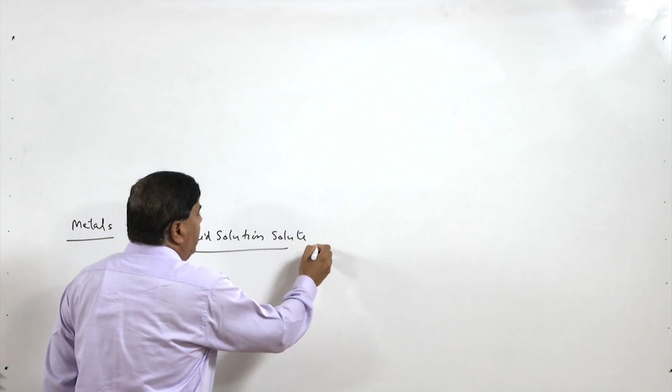We know that different metal systems are strengthened using different mechanisms, and these include solid solution strengthening, where in metal A, solute B is incorporated so that strength is achieved. Various types of solid solutions are formed, like substitutional and interstitial. Interstitial solid solution results in much higher strength with the addition of the solute compared to substitutional solid solution.

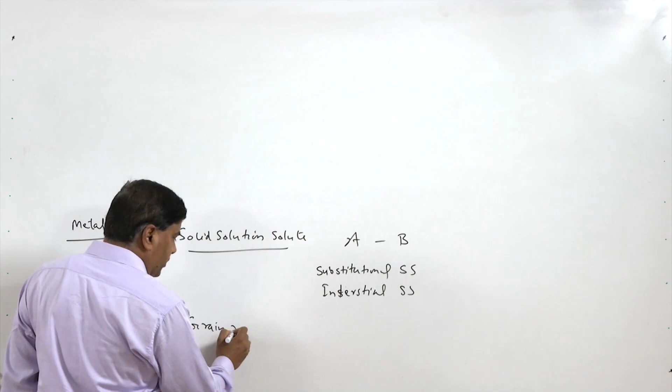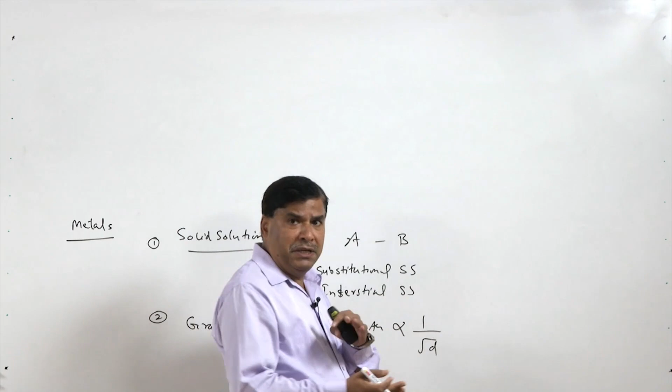Another commonly used mechanism is grain refinement. Metal systems are also strengthened by grain refinement, where the strength or hardness is found inversely proportional to the square root of the grain size. Finer the grain, higher is the strength. So whatever factors increase the grain size, either in the weld or in the heat affected zone, will lower the hardness as well as yield strength.

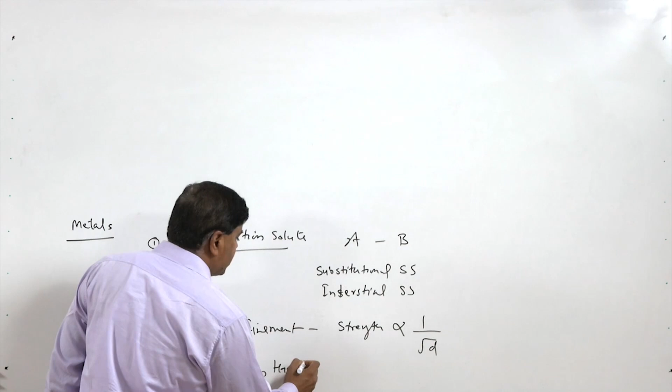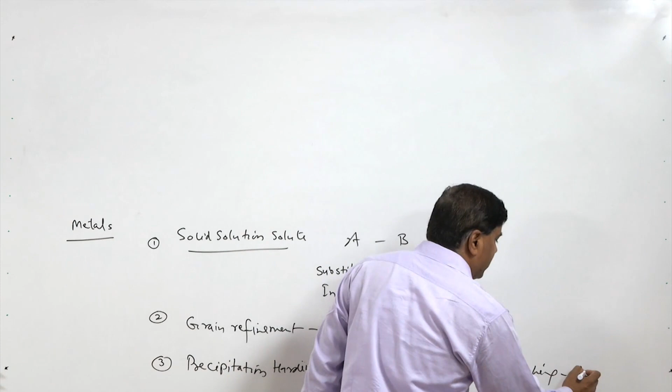Third is precipitation hardening. In this mechanism, whatever alloying elements are there, they are dissolved in the solvent through solution treatment, followed by quenching, so that a supersaturated solid solution is formed, and then aging is undertaken. During aging, precipitates are formed here and there, and they impart strength by forming precipitates in the matrix of the metal.

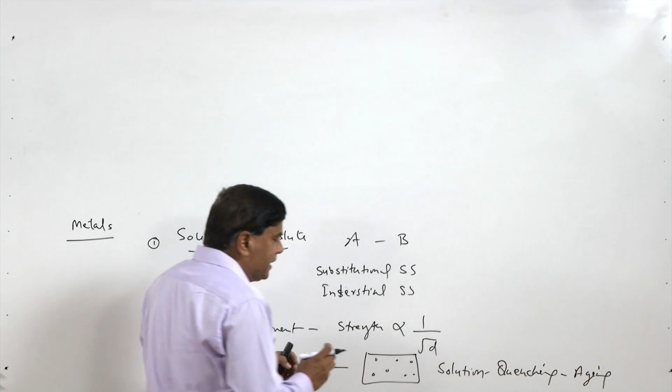Whatever factors lead to enrichment or increase in number of precipitates will strengthen the material. Otherwise, whatever factors cause coarsening of precipitates or their dissolution - there are two aspects, either the precipitates get dissolved in the matrix or they get coarsened - both these factors, due to application of heat, will lower the strength, because these metal systems get strength from the precipitates, and whenever due to external factors like application of heat, the precipitates either get coarsened or dissolved, the metal gets weakened.

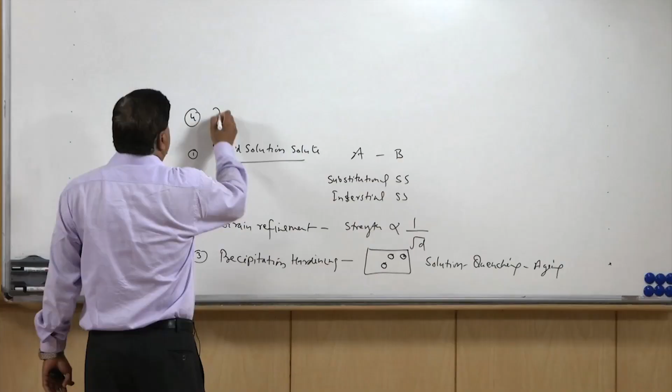Then the fourth mechanism is dispersion hardening. In dispersion hardened metals, the matrix is incorporated with certain constituents which do not interact with the matrix itself. These are mostly hard, but can be soft also to impart specific properties, like graphite or lead is also incorporated. Graphite is incorporated for the lubrication effect, and lead is incorporated for free machining, for developing free machining metal systems. But it is common to incorporate hard constituents in the matrix.

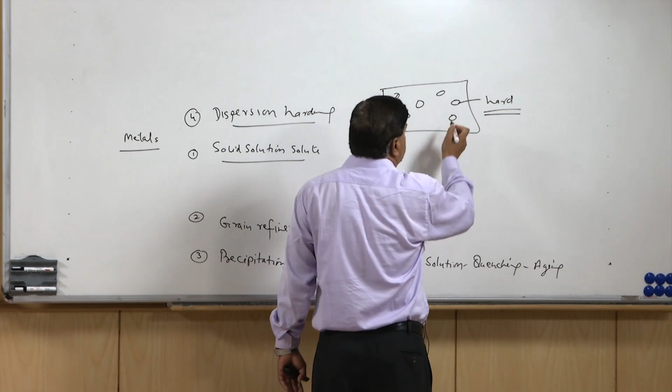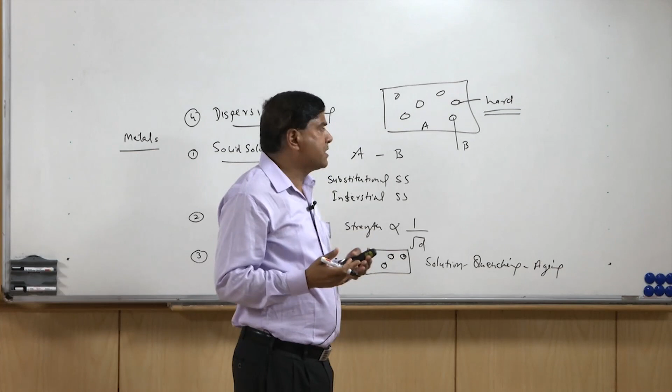So these constituents are not expected to interact with each other - say matrix is A and the constituent being incorporated is B - each constituent retains its own identity, and thereby imparts increased hardness, strength, or improved lubrication or wear resistance due to the lubrication effect by solid lubricants like graphite, or improved machinability, etc.

So in this case, the application of heat during welding does not actually affect the characteristics appreciably, except whatever change in properties occurs due to the change in grain size from the application of heat.

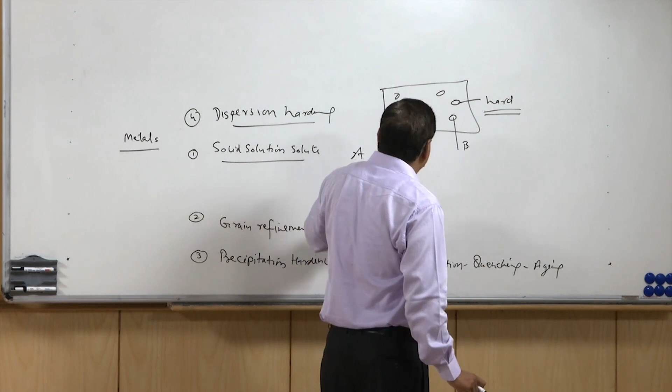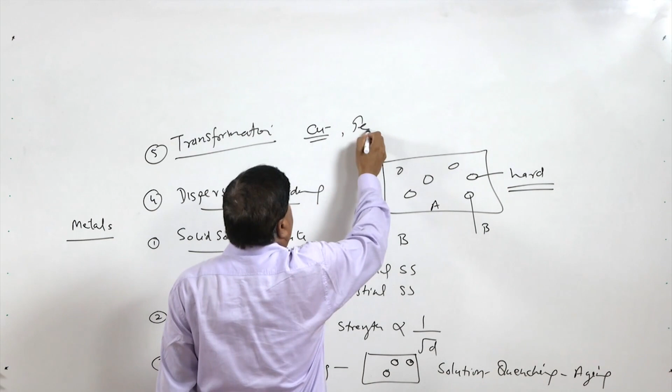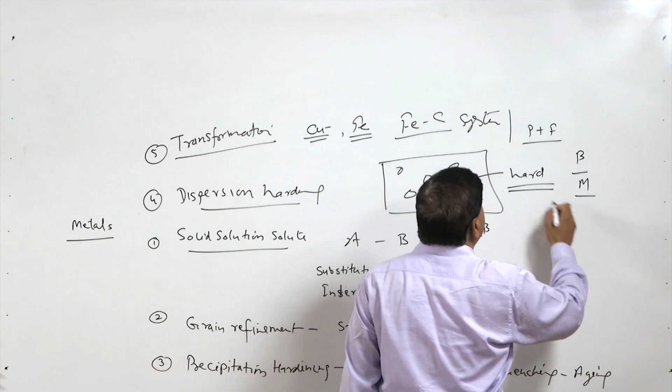And fifth is transformation hardening - transformation hardened metals, like these may be copper based alloys, or mostly these are iron based alloys. We know iron-carbon systems form steel or cast irons as per concentration. These systems result in formation of different types of phases, like in normal carbon steels we find pearlite and ferrite, but when subjected to specific kinds of heating and cooling cycles, we may have bainite, martensite, or a very fine mixture of ferrite and bainite, etc. Various phases can be formed which have their own characteristics, and accordingly the properties will be affected.

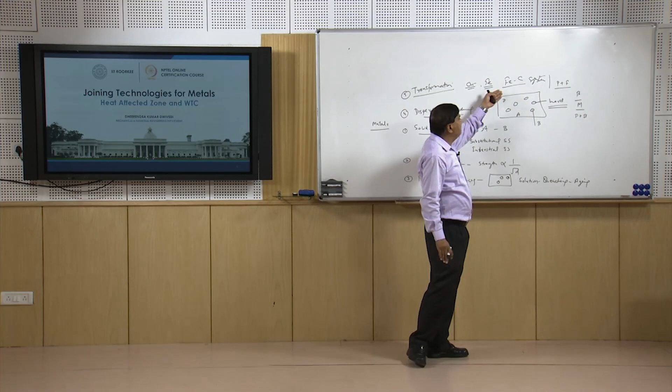Mostly in case of welding, the heating cooling cycles are extremely fast. So the hardenable iron carbon systems result in mostly hardening of the heat affected zone. So these are the five mechanisms which are there, and their relative effect is what we will be seeing.

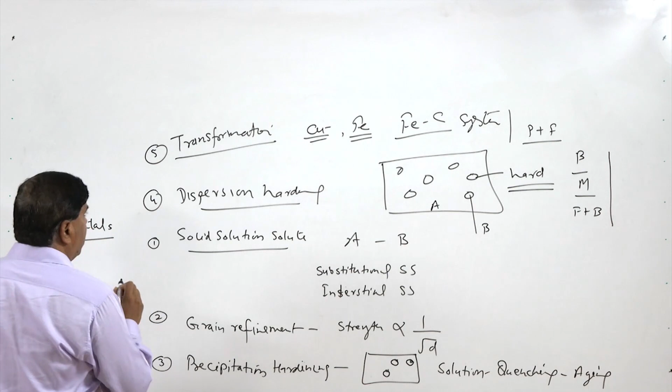There is one more, yes, the work hardening mechanism, the sixth one, which is also commonly used for strengthening of the metal. In work hardening, the metal system is deformed plastically, which produces a large number of dislocations here and there, and these dislocations interfere with the movement of other dislocations along the slip planes under external stresses. Whatever new dislocations are generated act as a barrier for the movement of other dislocations, thereby increasing the strength and hardness of the metal system.

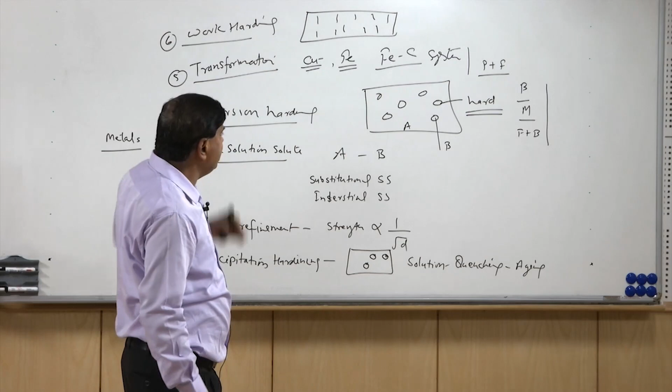As far as welding and the application of heat is concerned, these dislocations actually annihilate, they recover, they are lost due to the application of heat. So work hardened metal systems under the application of heat have the number of dislocations reduced, which in turn softens the metal system.

So as far as the heat affected zone is concerned, different metal systems strengthened by different approaches respond to the heat in different ways. What is that effect? That is what we will be seeing.

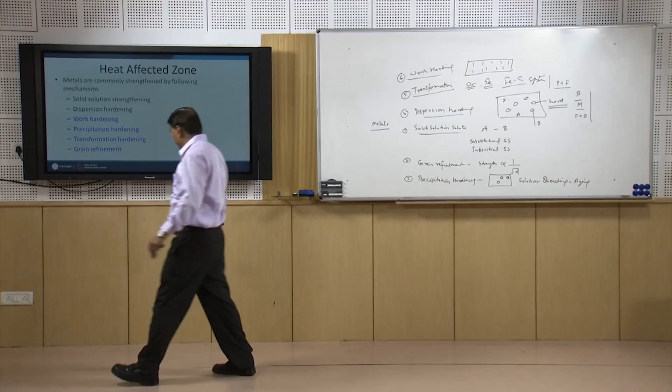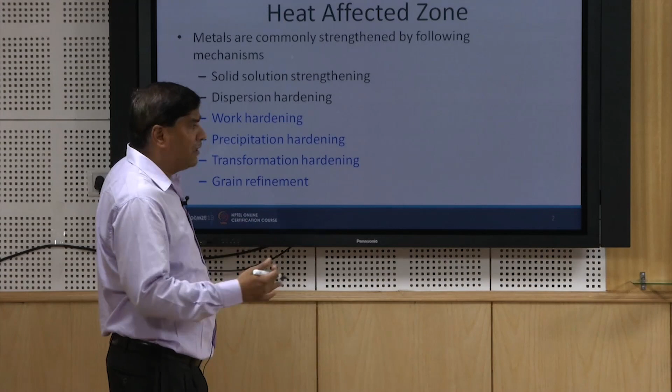Solid solution strengthened and dispersion strengthened or hardened materials are somewhat less affected by the heat applied during welding, while in the work hardening system, the effect of work hardening is lost due to annihilation or recovery of the dislocations. Precipitation hardening is affected due to the application of heat during welding in the heat affected zone near the fusion boundary. These precipitates either get coarsened, or get lost, or get dissolved due to the application of heat, so the metal gets softened.

In transformation hardening, with a high rate of heating and cooling, in case of ferrous metal systems, this mostly causes hardening despite grain coarsening and grain refinement. The metal systems which are only strengthened by grain refinement will have their hardness and strength lowered by coarsening in the heat affected zone.

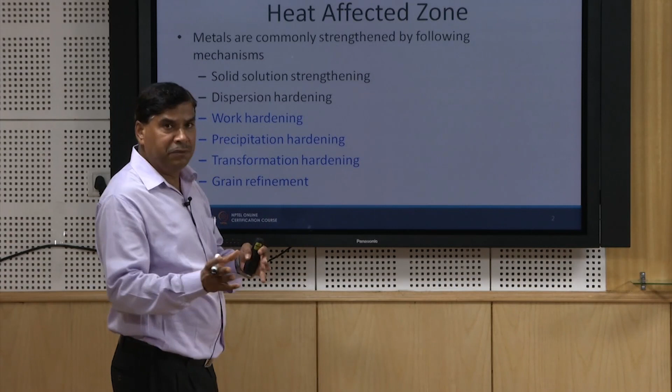So this is a very generic kind of description of the different metal systems and the way by which things are affected with respect to the heat affected zone. Now I will elaborate what the heat affected zone is first, and then the way by which specific metal systems are affected with the application of heat or due to the weld thermal cycle.

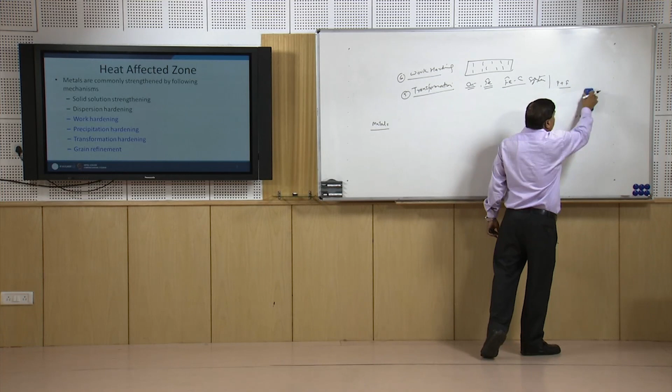The heat affected zone, as it reflects from its name, is the zone or region of the base metal which is affected by the heat applied during the welding of a given metal system. Every region which is affected by the heat, in terms of structure or mechanical properties, will fall under the category of the heat affected zone.

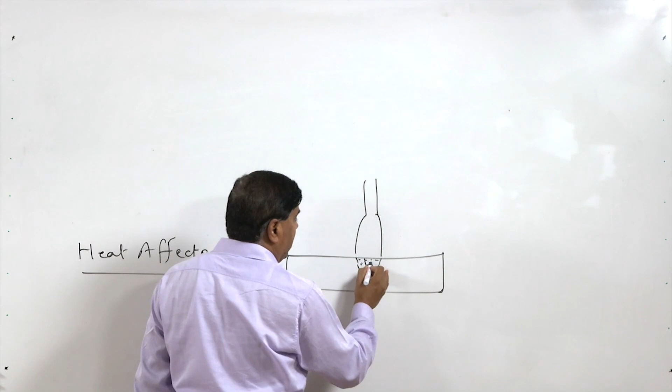During welding, the plates are joined with the application of a heat source, say a suitable arc is used for melting the edges of the plates to be welded. This melting results in the weld metal, and some of the heat applied for melting the edges of the plates is transferred to the underlying base metal. This heat, which is transferred back to the base metal away from the weld metal zone, is termed the heat affected zone.

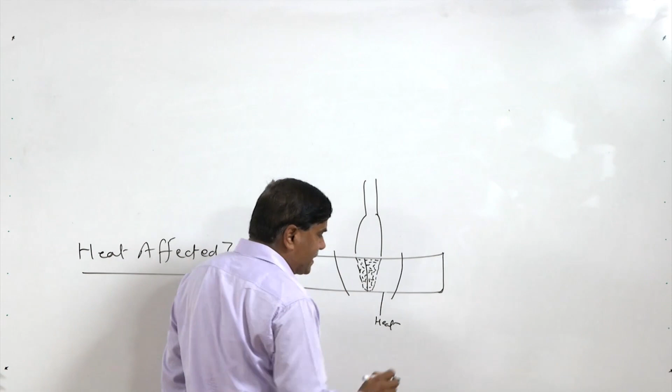But up to what extent the heat affected zone will be formed depends upon the distance up to which the change in properties is observed.

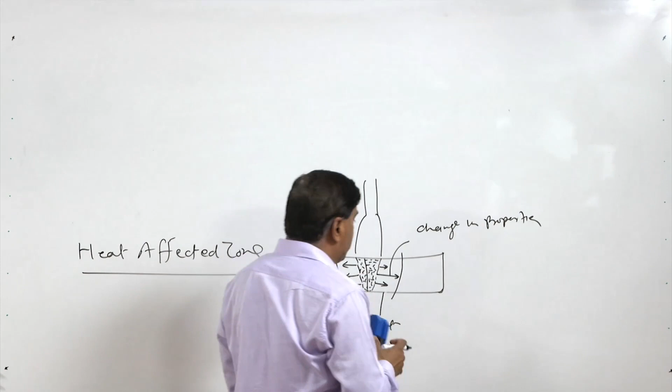Heat will obviously be transferred from the fusion zone to the base metal side, in both directions, causing a rise in temperature. The rise in temperature, up to a particular limit for a given metal, will cause a change in properties of the base metal.

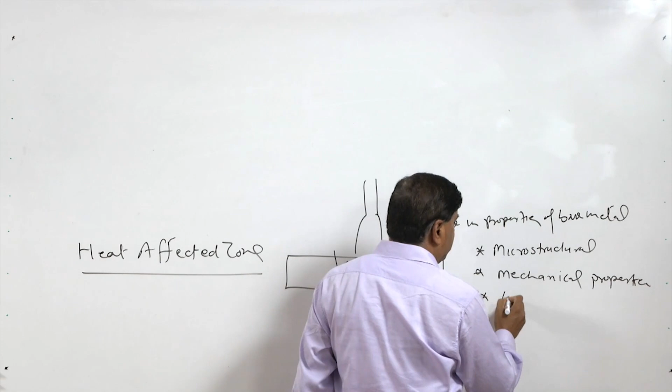This change in properties may be in respect of microstructural variation, in terms of mechanical properties, wherein either hardening or softening of the metal in the heat affected zone can take place, or there can be loss of corrosion resistance.

Corrosion properties can also be affected. Whenever heat is applied to the plates for the fusion purpose, some of the heat is transferred to the base metal, and this will change the underlying base metal properties in respect of structure, mechanical properties, and corrosion properties, either singly or in combination.

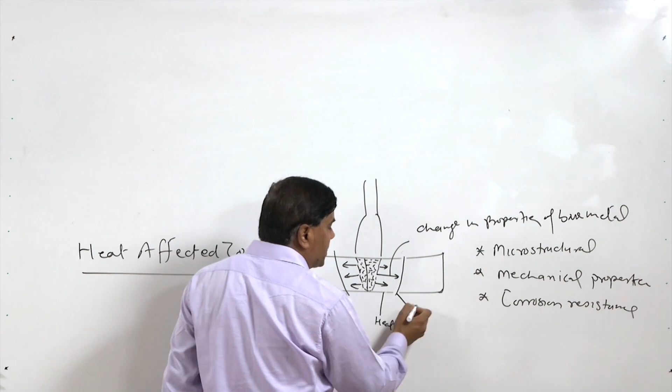The distance up to which these properties are affected is material specific. This change may occur up to the region which is heated above 200 degrees centigrade, or it may be above the region heated above 500 degrees centigrade, depending upon the metal system.

For example, whenever aluminum systems are welded, we will see that the regions heated above 150 degrees centigrade will be falling in the heat affected zone.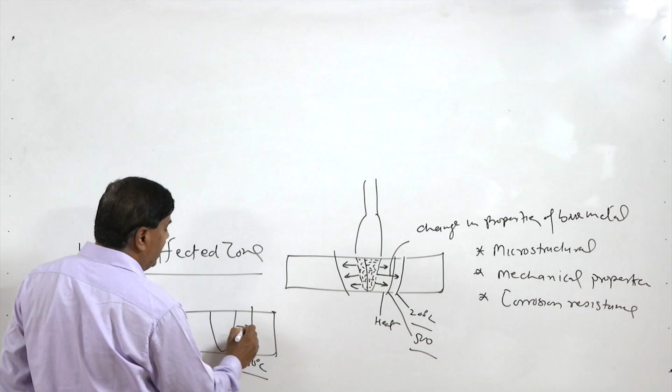If it is steel, say carbon steels in normal conditions, the regions heated above 730 degrees centigrade, like carbon steel in an anneal condition. If it is in quenched and tempered conditions, like Q&T steel tempered at 400 degrees centigrade, all regions heated above 400 degrees centigrade will be over tempered. So all regions away from the fusion boundary heated above 400 degrees centigrade will fall under the heat affected zone.

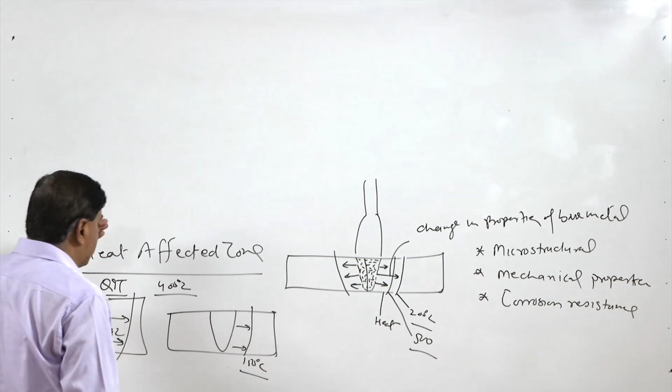So the temperature above which the heat affected zone is formed is material specific, and even for a given metal system, its condition also affects that particular temperature. This temperature may be 150, 200, 400, 800, anything, depending upon the kind of metal system we are talking about.

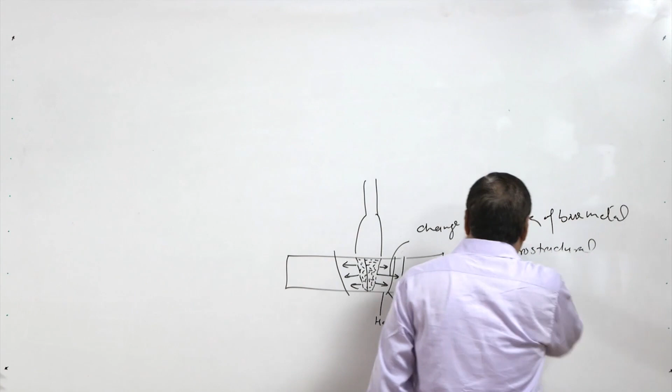So this is how the heat affected zone is defined, and the heat affected zone will experience the change in properties due to the application of the heat applied during welding.

Further, whenever heat is applied, fusion will occur at the faying surfaces. If we take 3 points away from the fusion boundary - point 1, point 2, and point 3 - each point will experience a different weld thermal cycle. Point 1 will experience the higher peak temperature and higher cooling rates.

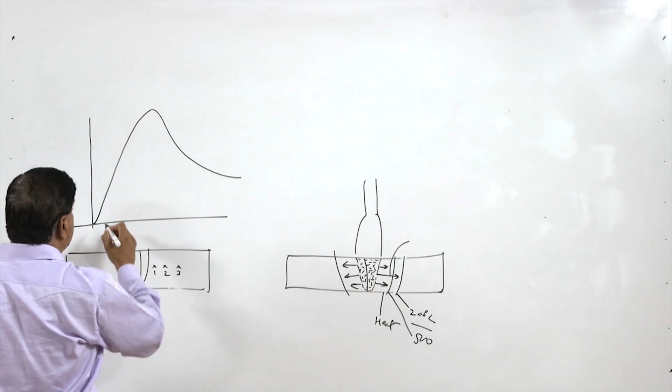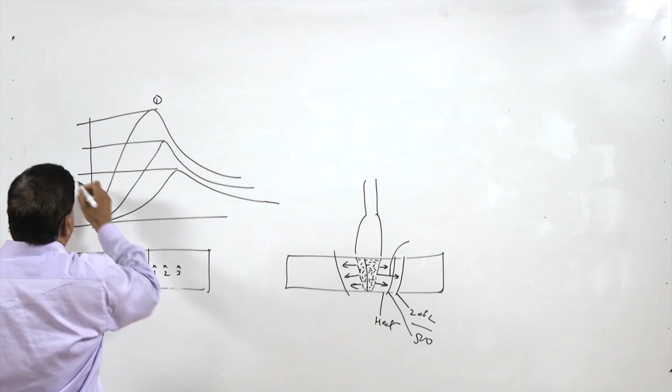Similarly, point 2 will experience somewhat lower peak temperature and lower cooling rates, and point 3 even lower peak temperature and lower cooling rates. So for point 1, point 2, and point 3, these are the respective peak temperatures - in the y axis we have temperature, in the x axis we have time.

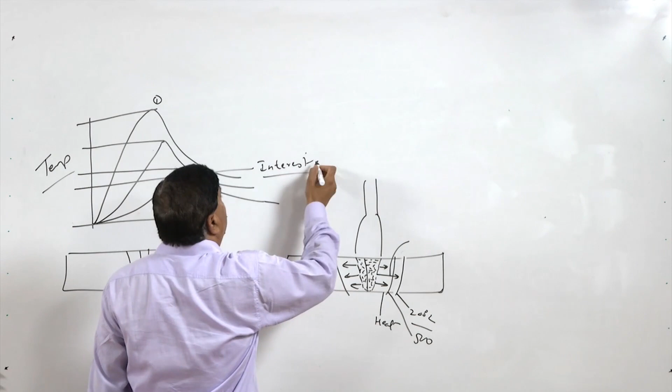What this reflects is that if we take any particular temperature, the 3 points will be exposed above it for a particular duration. So if the temperature of interest is this - the temperature above which properties will be affected - that's the temperature of interest.

So the duration for which point 3 will be exposed above this temperature is just this much, while this is for point 1, this is for point 2, and this is for point 3. The duration for which point 2 will be exposed above the temperature of interest will be this much.

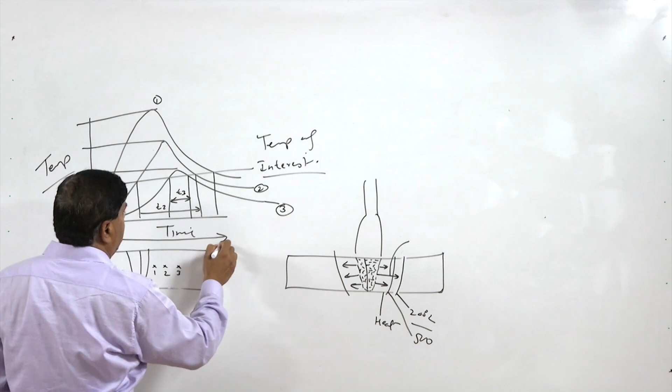So this is T3, this is T2, and what we see for T1 is really very long - this much. So the temperature T1 duration is really very long. If the temperature of interest is known, we can see that point 1 will be exposed for the maximum time T1, then T2, and then T3. So T1 is maximum, T2 is lesser than T1, and T3 is minimum.

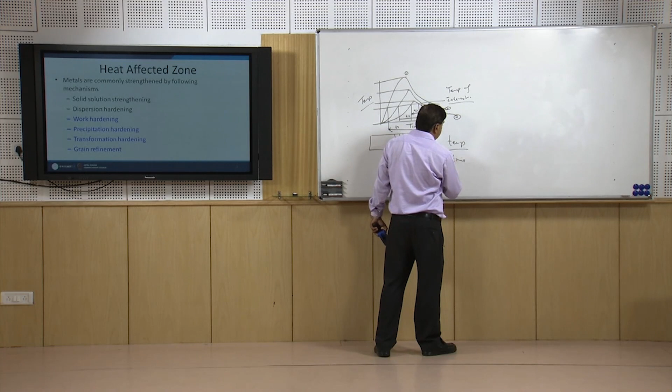So the temperature and time for which a particular point is exposed governs things appreciably. It's important to note that different zones will experience different temperatures. Point 3 experiences a very low peak temperature and the duration is also very short, while the peak temperature for point 2 is higher, and for point 1 is further higher. So the temperature for which a particular point is exposed, and the time for which that location is exposed above the particular temperature - these two factors play a big role in determining the characteristics of the heat affected zone.

So considering this background, now we will see how the different metal systems respond. Here I will first talk about the work hardened metal system.

Work hardened metal systems. We know that most metal systems during manufacturing are deformed plastically, and they get strength from that, like rolling or forging, especially done under low temperature conditions. Under those conditions, plastic deformation develops a lot of dislocations, which in turn increases the strength and hardness of the metal system.

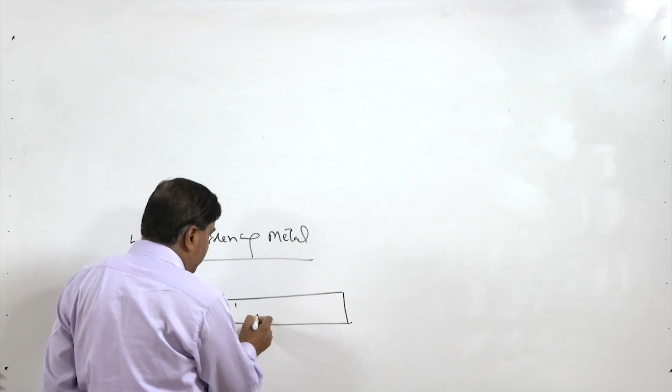Work hardening metal systems are designed to be deformed for fabrication purposes, so that during manufacturing itself sufficient dislocations are generated, and these dislocations impart strength and hardness to the metal system. But when these metal systems are subjected to welding, in which way do they respond? That is what we will see.

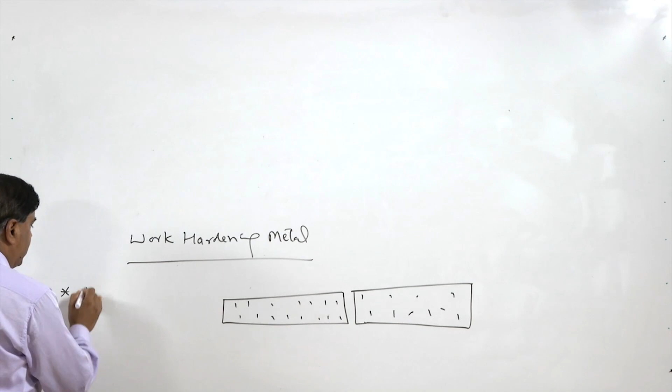There are basically two ways by which work hardened metal systems are affected with the application of heat during welding: recrystallization is one, and grain growth is another. Both these factors are influenced by the heat being applied and the time for which the high temperature is maintained.

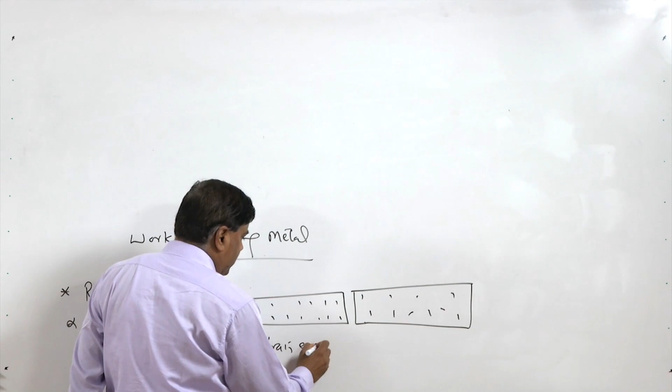So we will take up the first one, recrystallization. The driving force for recrystallization is the strain energy stored - greater the deformation, greater will be the strain energy stored, so easier will be the recrystallization. There is a particular temperature at which recrystallization takes place.

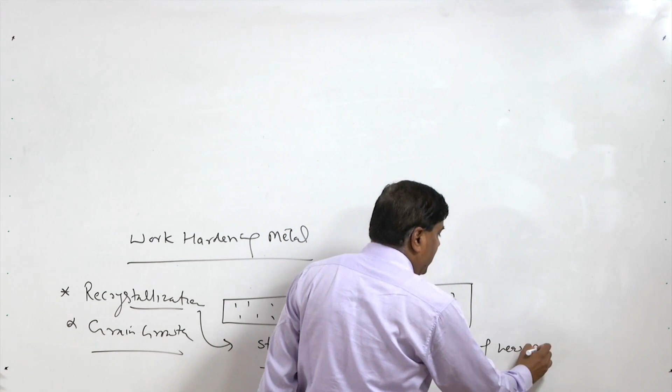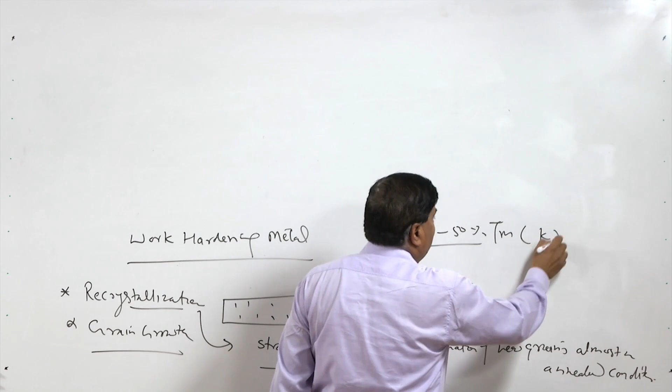So what is recrystallization? It is about the formation of new grains, almost in annealed condition, meaning all the work hardening effect is lost and whatever new grains are formed, they are in annealed condition. This happens at a particular temperature, like say 40 to 50% of the melting point temperature in Kelvin of the given metal, and this temperature sometimes decreases with the increase in strain energy stored or due to the kind of deformation the material has been subjected to.

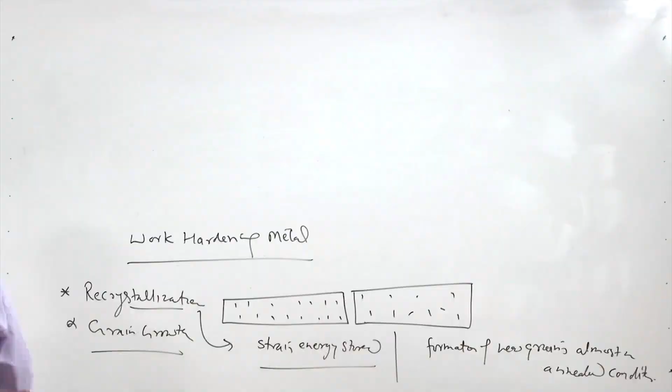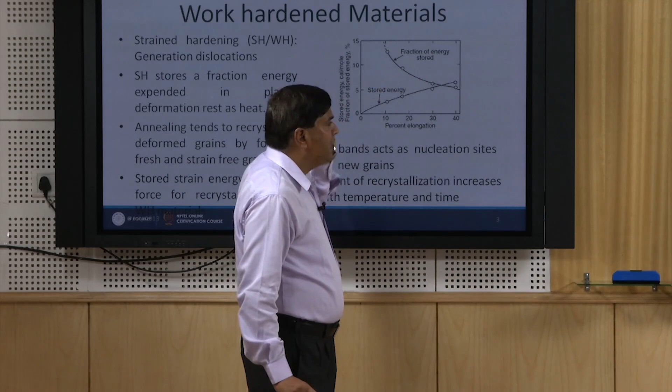So what we will see here: the strain energy stored affects the temperature at which recrystallization will occur. As we increase the deformation, increase in elongation takes place, increase in strain is taking place, so the stored energy increases continuously, and the fraction of energy stored out of the energy supplied keeps on decreasing. So strain energy stored increases with the strain or deformation being applied.

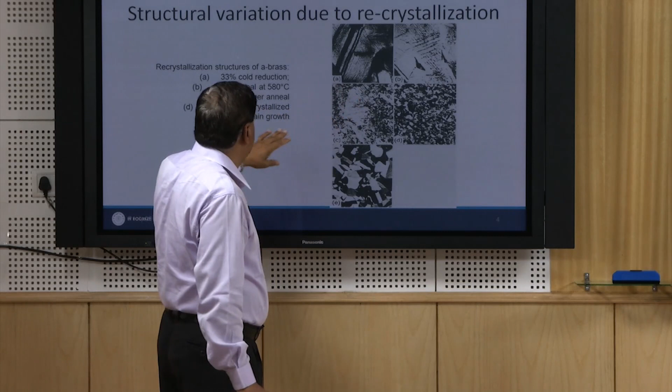Whenever heat is applied, the material in a very strained condition offers a large number of dislocations. When material is annealed for a short period, some of these dislocations are lost or annihilate, and further longer annealing results in the complete loss of these dislocations, and then complete recrystallization and formation of new grains takes place with continuous exposure at high temperature - that is called annealing. If after complete recrystallization further exposure at high temperature during welding continues, it results in coarsening of the grains.

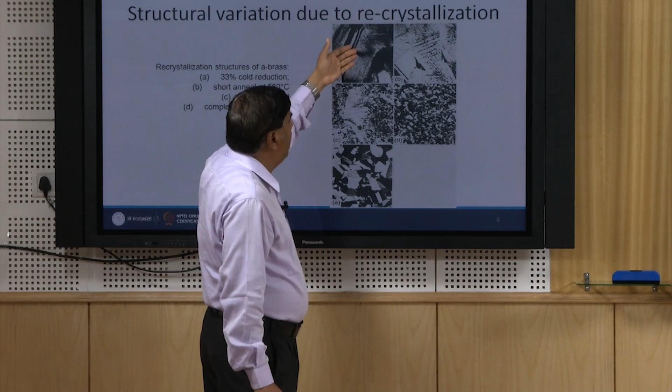So material, right from its original condition in deformed state, shows a large number of dislocations, and these dislocations keep on decreasing with the increase in time at a particular temperature during annealing, and overexposure causes grain growth - this is the third or last stage. So first recrystallization, and thereafter grain growth takes place.

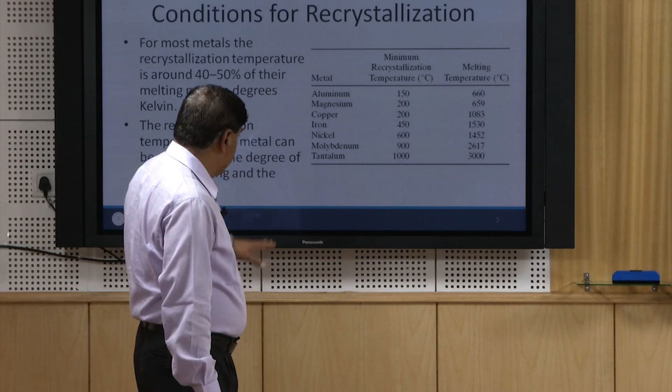Different metal systems show recrystallization tendency at different temperatures. With respect to metal systems, aluminum recrystallizes above 150 degrees centigrade while its melting point is 660 degrees centigrade. Similarly, magnesium recrystallizes above 200 degrees centigrade while its melting point is 659. Similarly, iron recrystallizes above 450 degrees centigrade while its melting point is 1530 degrees centigrade.

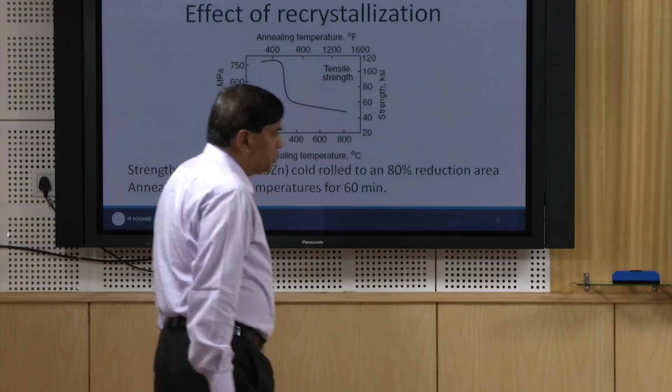So likewise, each metal recrystallizes as soon as exposure above a particular temperature is given, and this is found to be significantly lower than its melting point. We know that metals get strength from dislocations, and in course of the exposure, these dislocations are lost, which in turn lowers the strength of the metal system.

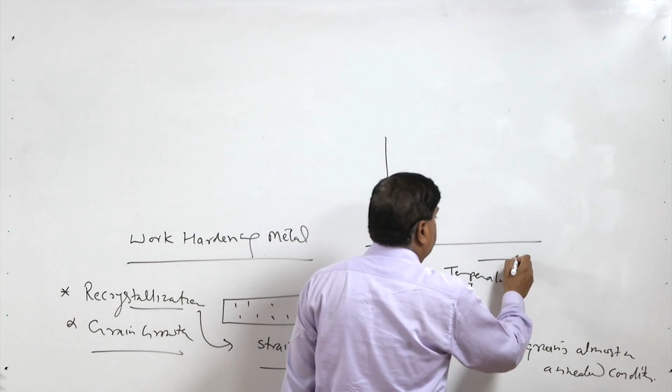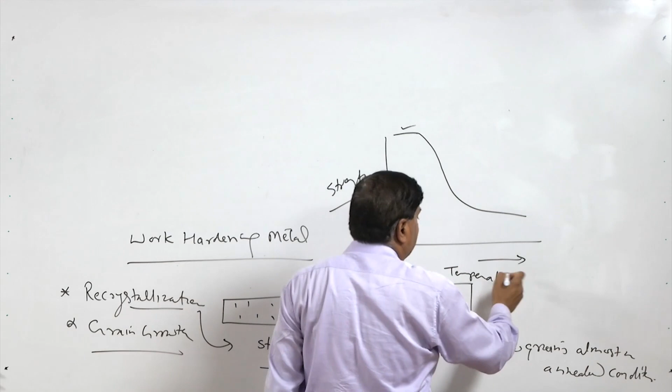Consider the temperature of exposure. As the temperature of exposure increases, the metal which is in work hardened condition will initially offer higher strength, but as the temperature of exposure is increased further, we see a significant reduction in strength. So the cold worked metal offers very high strength, and as it is exposed to increasing temperatures, or increasing annealing temperature, the extent of recrystallization increases, which lowers the strength of the metal system.

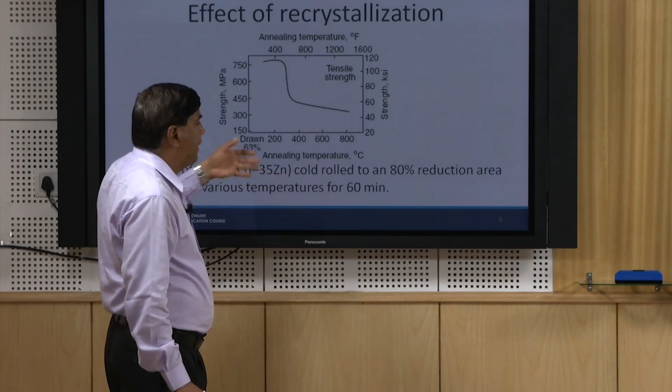For example, material cold drawn up to 63%, when exposed to 200 degrees centigrade, shows no major drop in hardness. But as the exposure temperature increases to 400, 600, 800 degrees centigrade, there is a sudden drop in the strength of the cold drawn brass. This sharp reduction is attributed to complete recrystallization occurring in the brass, since its recrystallization temperature is around 200 degrees centigrade, as seen in the previous slide. As soon as it is exposed, rapid recrystallization takes place, causing a significant drop in strength at high temperature.

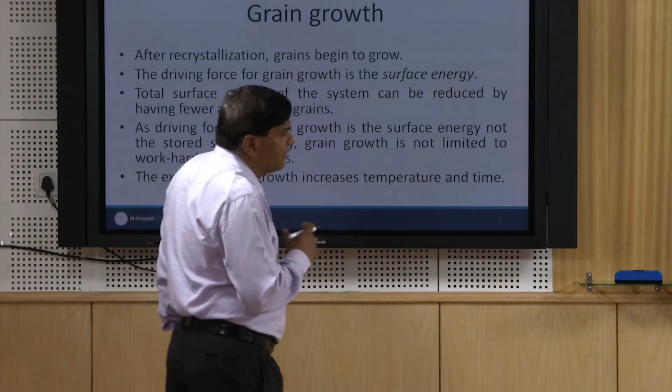This is what we see: whenever a work hardened metal system is exposed to external heat, the metal near the heat affected zone recrystallizes, and the formation of new annealed grains lowers the strength compared to the work hardened condition.

So basically the effect of work hardening is lost due to recrystallization. If further heat and high temperature exposure continues, it causes growth of the grains. Growth of the grains again causes a reduction in strength and hardness due to grain coarsening. The driving force for grain coarsening is different from that of recrystallization, so now we will look at the factors governing grain growth.

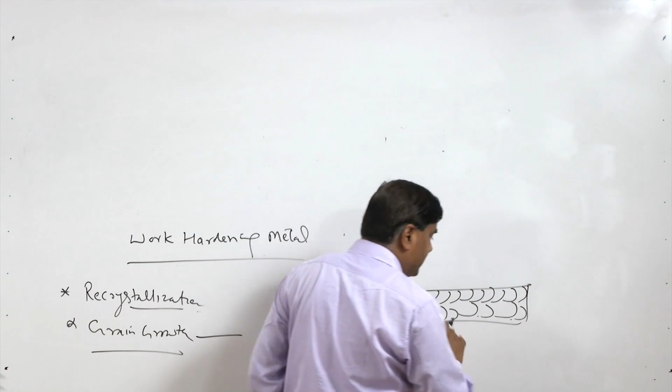For grain growth, the driving force is surface energy, not strain energy as in recrystallization. Most metal systems are made of a large number of grains; more grains means larger grain boundary area, and greater grain boundary area means greater surface energy associated with it. All metal systems try to attain minimum energy for maximum stability, so under favorable conditions they tend to attain a larger grain size, so that fewer grain boundaries help reduce the associated surface energy.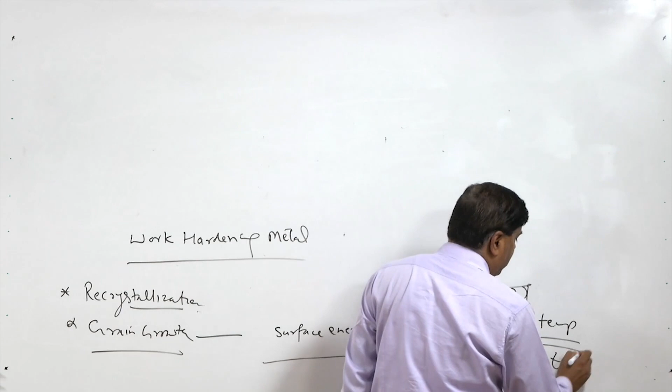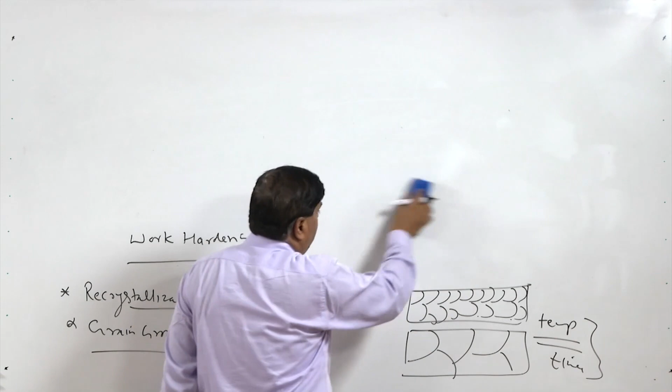For this purpose, high temperature is needed, since this process is governed by diffusion, or is diffusion dependent. It needs enough temperature and time so that diffusion can facilitate the coarsening and this change in grain size for maximum stability of the system. Because systems tend to reduce their surface energy, and strain energy does not play any role in grain growth, it is surface energy that governs the grain growth aspect.

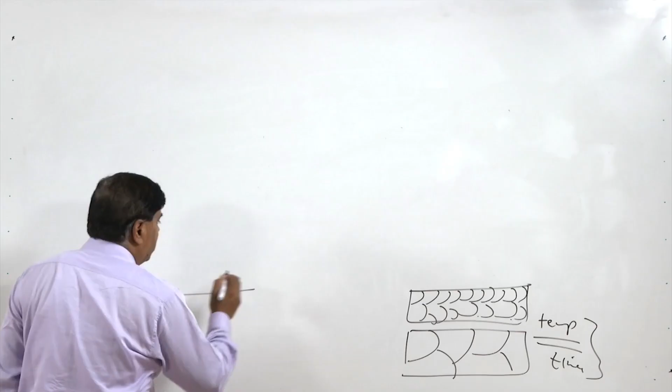Therefore, the grain growth phenomenon is not limited to work hardened materials only, but applies to all kinds of systems. Since most metal systems are polycrystalline in structure, they tend to attain minimum surface energy through grain coarsening. Whenever favorable conditions for diffusion exist, such as high temperature for sufficient time, grain growth occurs. So driving force for grain growth is surface energy, not strain energy, and grain growth is not limited to work hardened metal systems but applies in all cases.

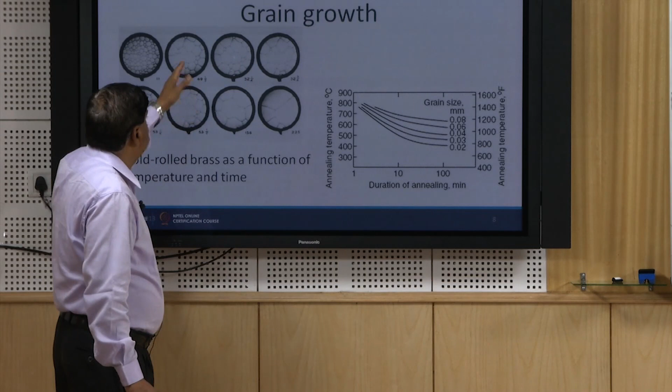Consider a cold rolled brass system and how grain size is affected as a function of time and temperature. Work hardened metal systems have very fine grains, and as exposure continues to increase in terms of time, we see a continuous increase in the grain size.

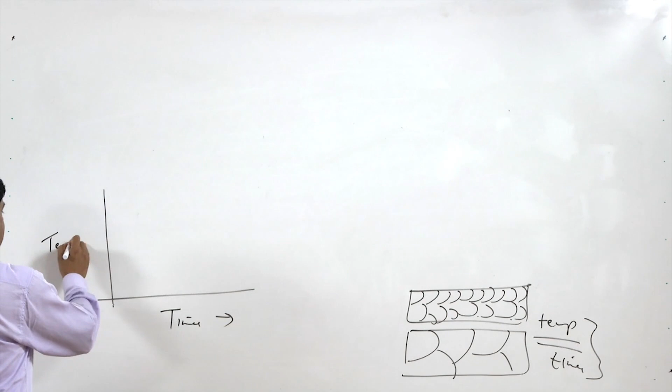This is the same thing we can see from this diagram also: annealing temperature versus annealing time. So temperature versus time. Here in the x-axis we have time, and in the y-axis we have temperature. So how the grain size varies - let's say this is one, this is another, this is another, if you consider three grain sizes.

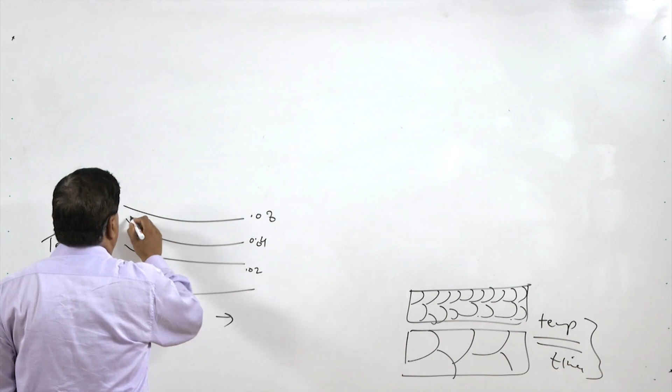So for 0.02, 0.04, and 0.08, or we can have one more like 0.06. This is the grain size in inches, and typically the temperature values are 300, 400, 500 likewise, and the time in log scale 1, 10, 100, 1000 like this. So here it will be further longer, like say 10 and 100 in hours.

So what we can see here is, for the given grain size let us say 0.04 inch, how the grain size changes as a function of time.

If the exposure is given say at 600 degree centigrade, then how will the grain size change? The grain size will be, say, after 1 hour this is 0.02, then after 8 or 10 hours it will be 0.04, then 0.06.

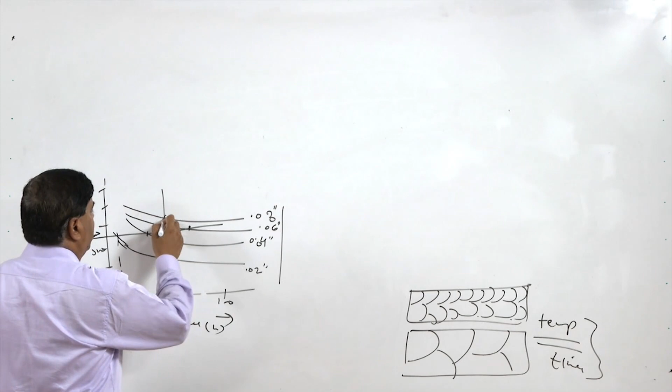So as a function of time, the increase in time coarsens the grain, and similarly for a given time, increase in temperature also increases it. For example, 10 hour exposure at 450 degree centigrade leads to 0.02 inch grain size, then the grain size will keep increasing with increase in temperature for a given period.

So basically the grain size variation with temperature and time is like this: for a given time, increase in temperature increases the grain size, or for a given temperature, increase in time increases the grain size.

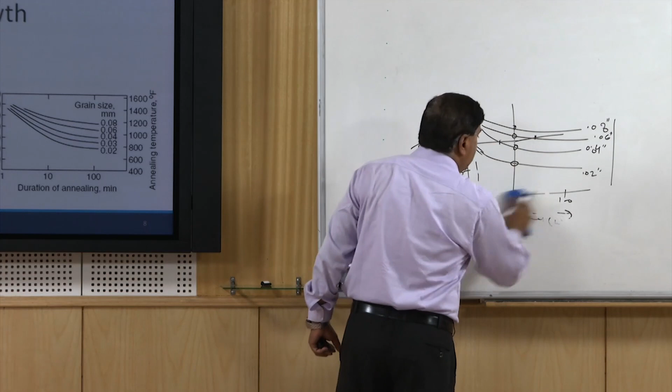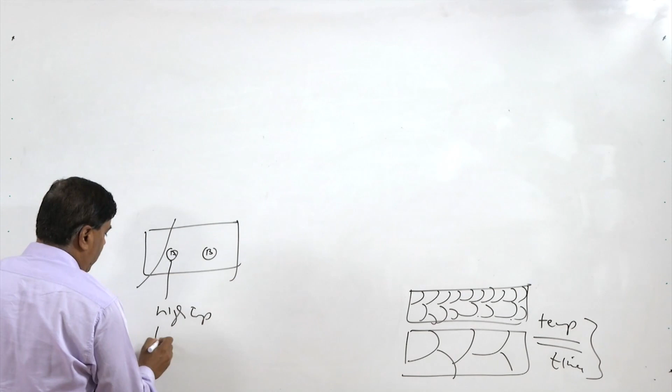Now we have to relate this with the weld joints. We know that the point closer to the fusion boundary will have a higher temperature, like say points A and B. Point A will have high temperature and long duration at high temperature, as we have seen from the weld thermal cycle, while point B has low temperature and short high temperature exposure.

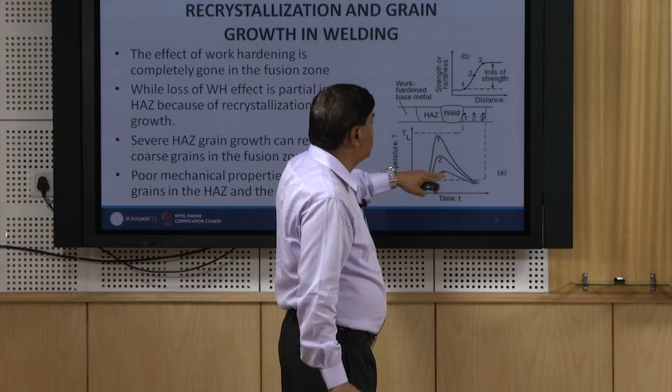This is just the opposite, and this in turn will be reflected in the weld thermal cycle. So this is the effect of the weld thermal cycle. When the point is very close to the fusion boundary, peak temperature is high, and the duration of high temperature exposure is also long as compared to points 2 and 3.

Accordingly, we will see that the loss of strength due to recrystallization and grain growth is maximum at point 1, and the loss of strength and hardness keeps decreasing as the distance from the fusion boundary increases.

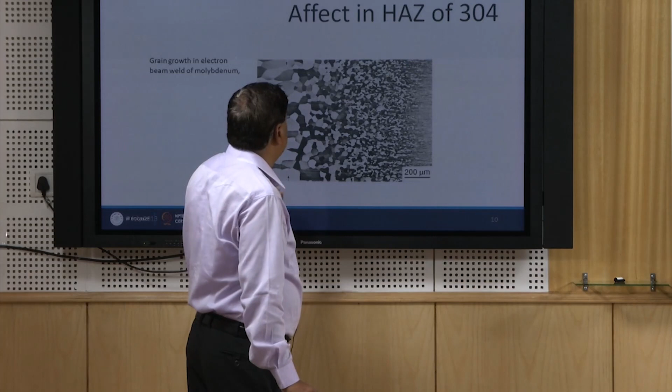This is what we can see here: the points very close to the fusion boundary will have coarser grains, and as we move away from the fusion boundary, the coarsening keeps decreasing.

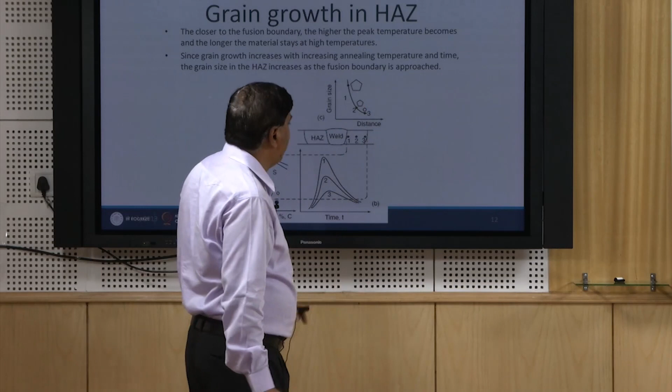The same thing can be seen from here: point 1, very close to the fusion boundary compared to 2 and 3, will experience more grain growth. Point 3 will have minimum grain coarsening compared to 2 and 1. The main reason for this is the difference in peak temperature and the duration for which higher temperature exposure is given.

The temperature will be higher and for longer periods at point A as compared to point B. So that is why we see maximum coarsening near the fusion boundary compared to areas away from it.

Now I will summarize this presentation. We have seen the different mechanisms used for strengthening metal systems, and how the heat of welding can affect the properties of metal systems strengthened by different approaches. Especially in detail, I have talked about how the weld thermal cycle affects the heat affected zone characteristics, and accordingly its effect on grain size and properties of the heat affected zone, especially of the work hardened metal system.